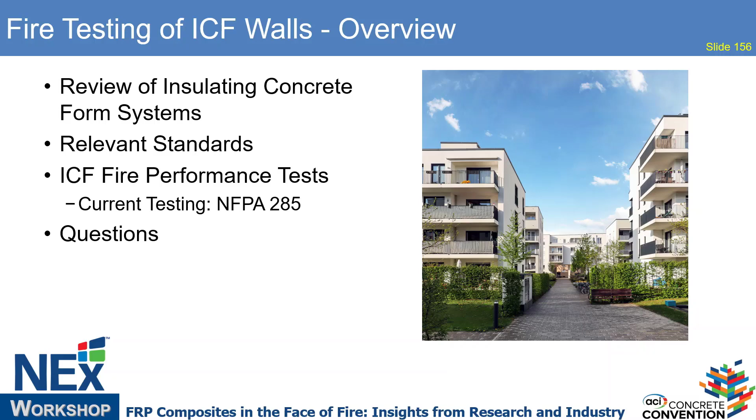EPS, expanded polystyrene panels on either side, and they're held in position by the cross ties, which typically are plastic. Polypropylene is the most commonly used material. There's concrete on the inside with rebar, and then on the outside you'll put whatever cladding is the designer's desire to have. So that's the description from the interior surface to the exterior surface.

When the wall is constructed, the contractor—these ICF forms come, typically, not always, 4 feet long, 16 inches high, and they stack up just like giant Lego blocks. And just like giant Lego blocks with your children, if there's a problem the way the first course is stacked, it only grows as you go up the wall. So you have to be careful that they're stacked properly.

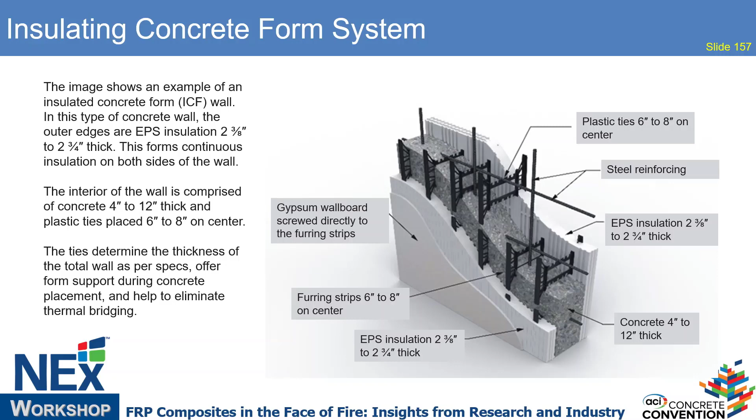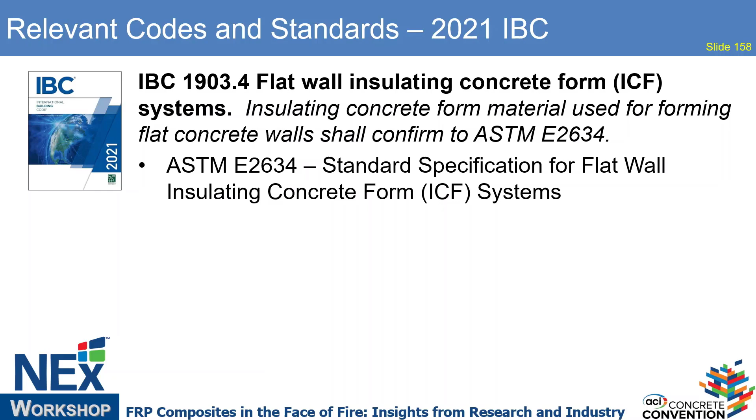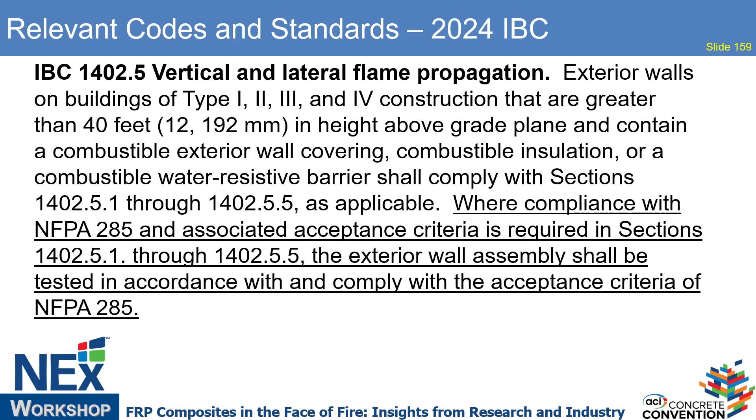The 2024 edition was just published, and there was some work done right here. It says 40 feet. That actually does not appear in the final version of the text. This text there is the impetus for some things towards the end of the presentation. So, and ICF. Before I do that, I'm going to go through all of the tests that are in progress for ICF.

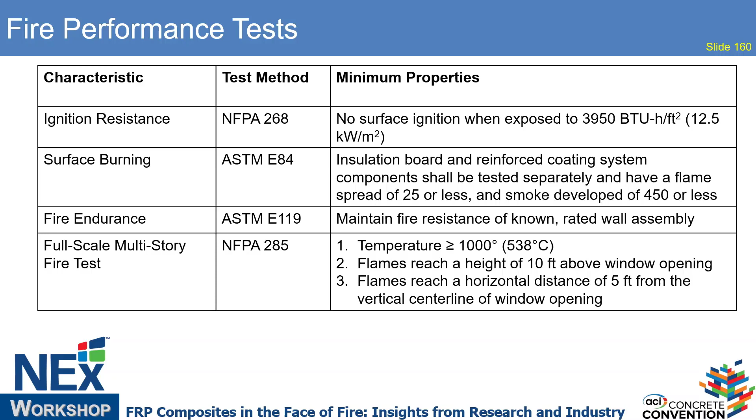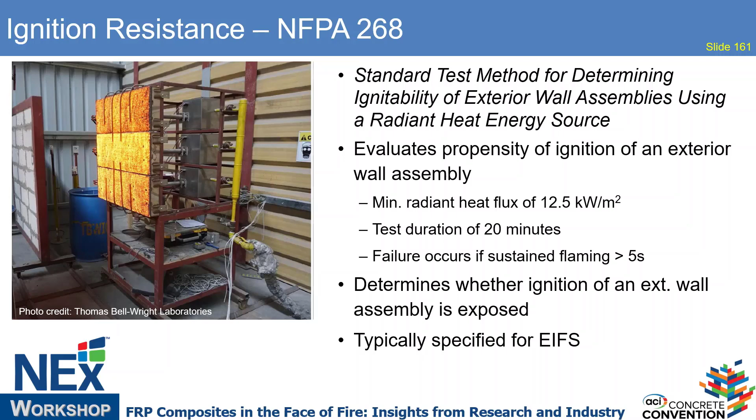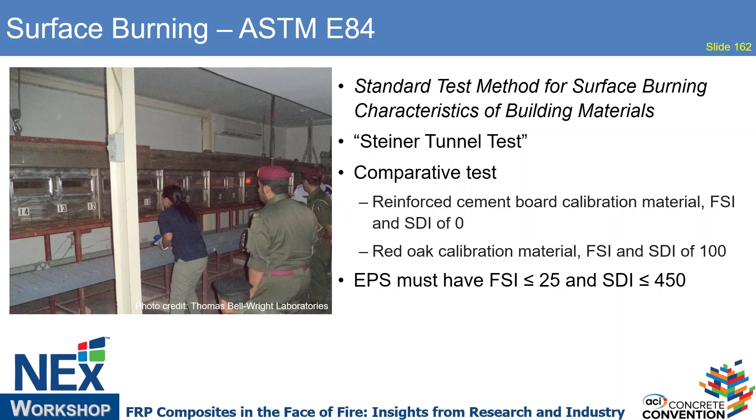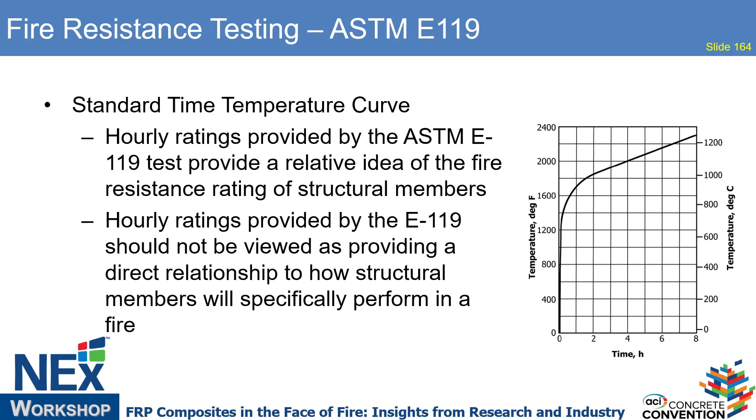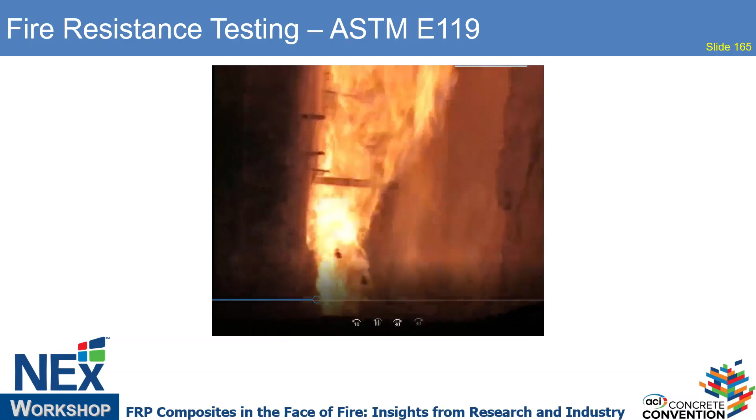I won't go too much into detail about ASTM E119. It was covered quite a bit in previous presentations. I will just mention this is a test for structure. It's representative, but this is not necessarily real performance. It is a test. And you saw this time temperature curve here. As I mentioned, these ratings should not be provided in relationship to specific fires. You actually saw kind of a section view of this furnace, and that was actually an actual test of ICF.

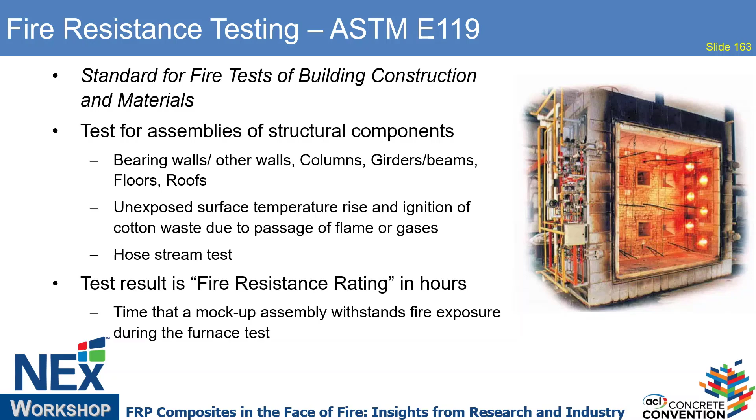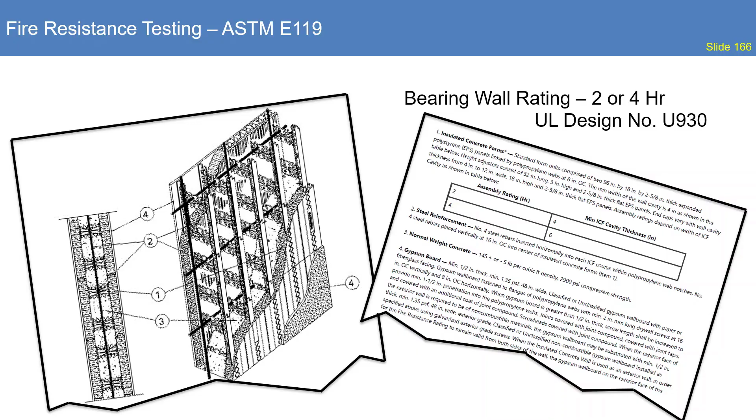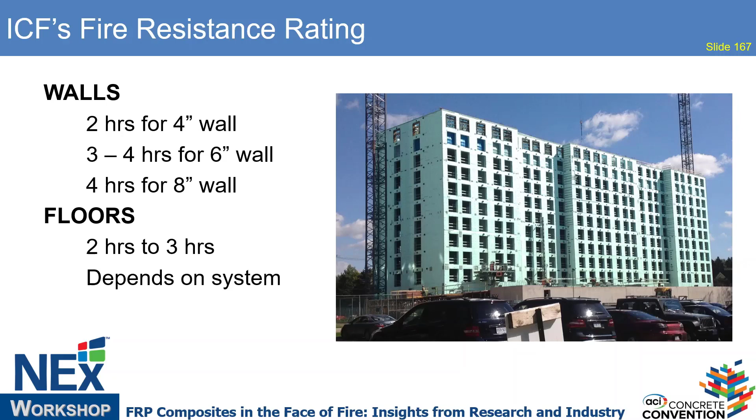So based on that ASTM E119 test, you can actually go into the UL online certifications directory, and you will find certified test listings for ICF. In this particular one, it's a rating for 2 hours if it has a concrete thickness of 4 inches. So ICF assemblies do carry a fire resistance rating. It varies with the manufacturer listing, typically for 4-inch concrete 2 hours, and between 4 inches and 8 inches up to 4 hours. We do also have ICFs with 2 to 3 hour systems.

I did want to go over, this is not a required test, but I wanted to talk a little bit about how ICFs perform in explosion types of events. And so there was some blast resistance testing in 2003. This was done in preparation for a force protection demonstration that took place at a base. It was really used to demonstrate the blast resistance of ICFs. So the testing involved these ICF reaction boxes that were constructed. You can see in the picture, these are the reaction boxes right here.

And they were subjected to blasts providing a 50-pound charge of military-grade TNT. These reaction boxes were placed at various distances, from 6 feet to 40 feet. The acceptance criteria the military uses is that personnel inside the ICF structure survive the blast. In the testing outcomes, there was limited damage observed to the concrete structure, because the EPS absorbs energy from the shock waves, dissipates energy over time, and also cushions the concrete.

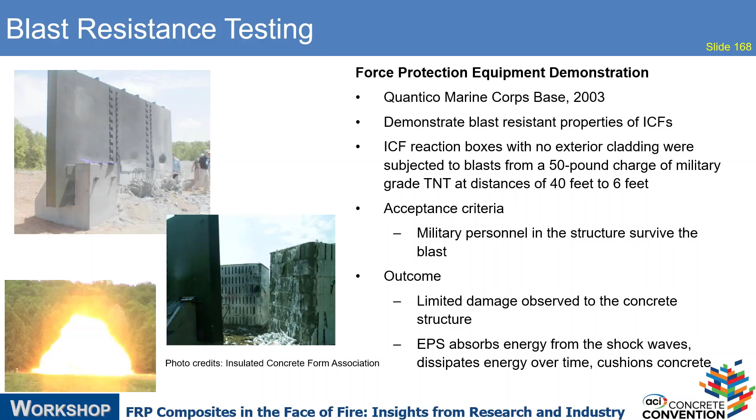And I particularly wanted to show you this testing because we also have a real case study where we saw this somewhat in action. This is a case study of an ICF concrete apartment building that survived a fire.

This was in East Harlem, New York City, in 2014, and there was actually a gas explosion that occurred next door. That gas explosion had destroyed 2 apartment buildings. It caused 4 neighboring properties to be evacuated, and it also shattered windows that were located 3 blocks away. So, obviously, this impacted buildings and households because they weren't necessarily right in that location.

There were 8 deaths, 70 injuries, and a large response of 250 emergency personnel. This was actually in the news because the utility was found responsible for $153.3 million worth of damages. But in all of that tragedy, the ICF concrete building that was right next to the building where the explosion occurred survived and was able to make repairs. And these are some pictures.

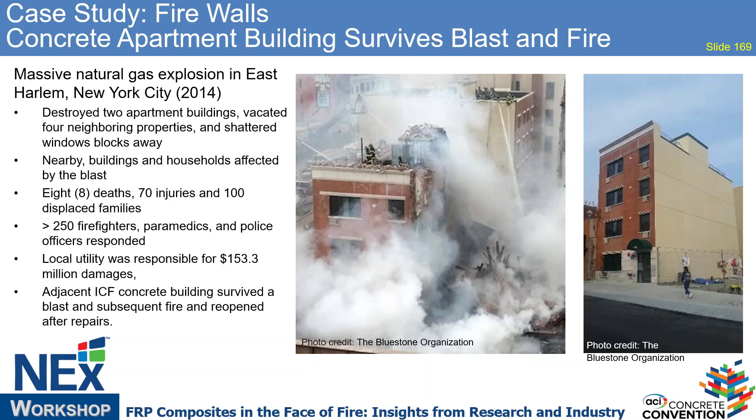The New York Department of Buildings engineers report noted that this building survived even though it was inches from where the explosion occurred. I mentioned that there was debris when this building exploded. Some of the debris is along Park Avenue, where the subway is actually above grade, so it has elevated tracks. There was so much debris that it landed on those tracks, and so service was suspended for most of the day.

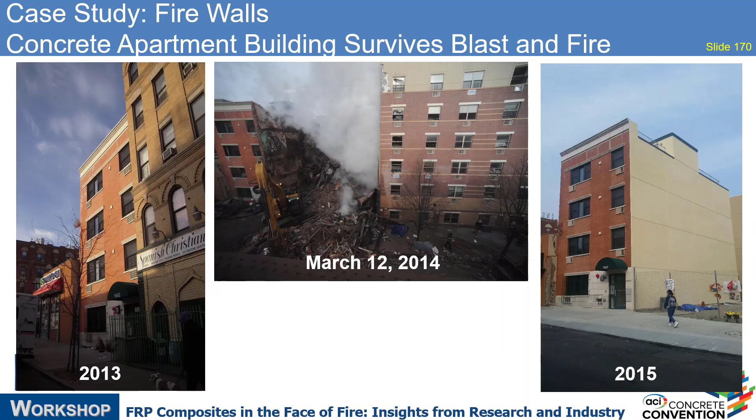But that debris also landed on the roof. And so when the fire service came as part of their fire operations, there was a lot of damage to the roof, so those were the repairs. So we've kind of gone through all of these tests that have been done for ICF construction to date. The missing piece is this test, the NFPA 285 test, which is really looking at

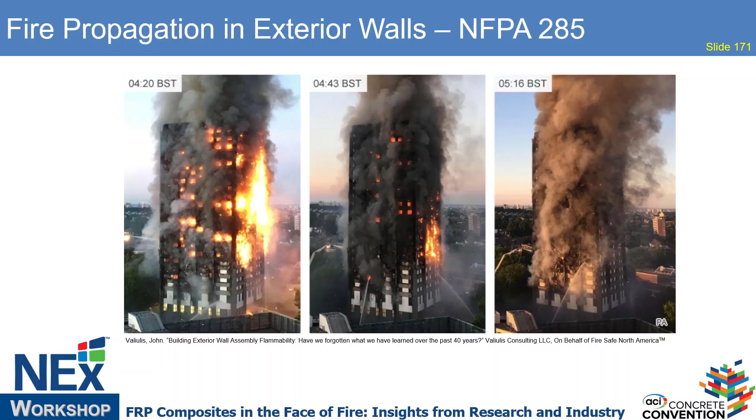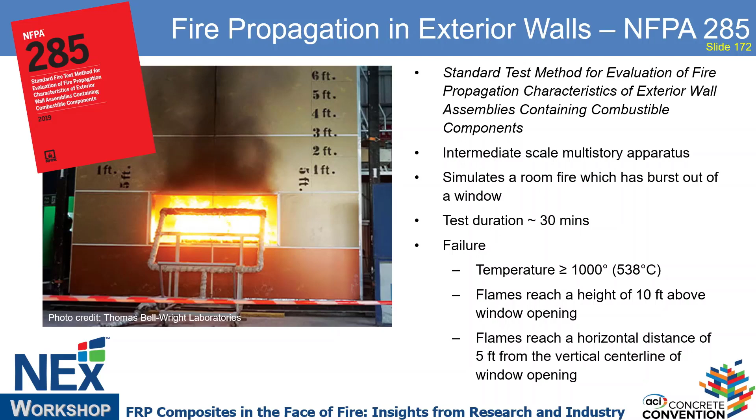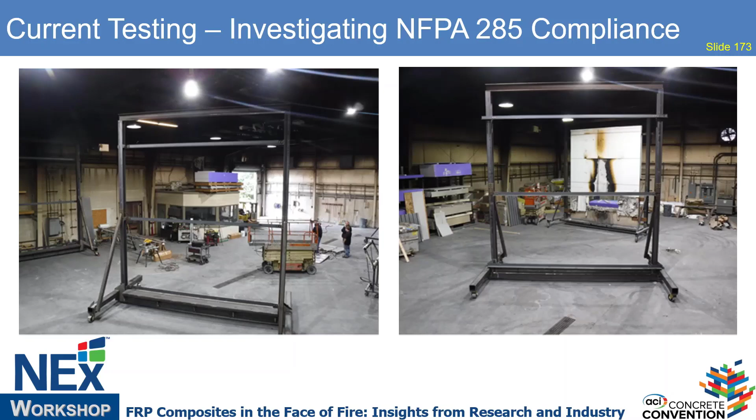Our walls are a little bit different than most other exterior walls because we have a thickness of concrete plus a thickness of foam. So it actually has to be built on this frame, and the weight of our assembly is typically heavier than a lot of the assemblies tested. So these frames are specifically constructed for ICF wall assemblies. They have a 15-ton capacity to accommodate the weight of our walls.

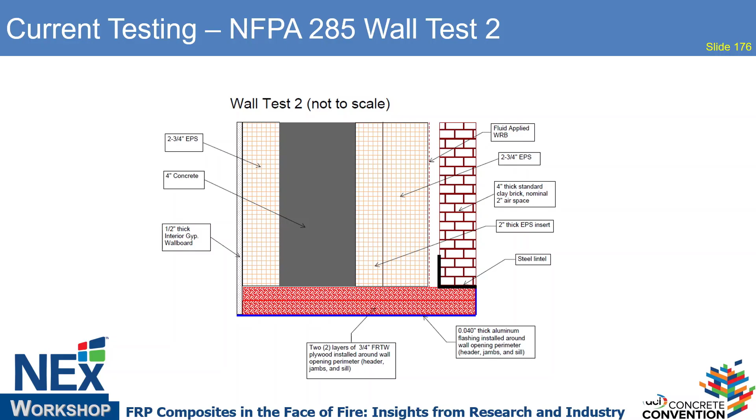These are some draft details of what the whole thing is going to look like, including insulation, flashing, and the connection details. Our second test is with another configuration, and we assume that this test is going to be better for obvious reasons than the first ICF test. We have the same things as well. This is the detail.